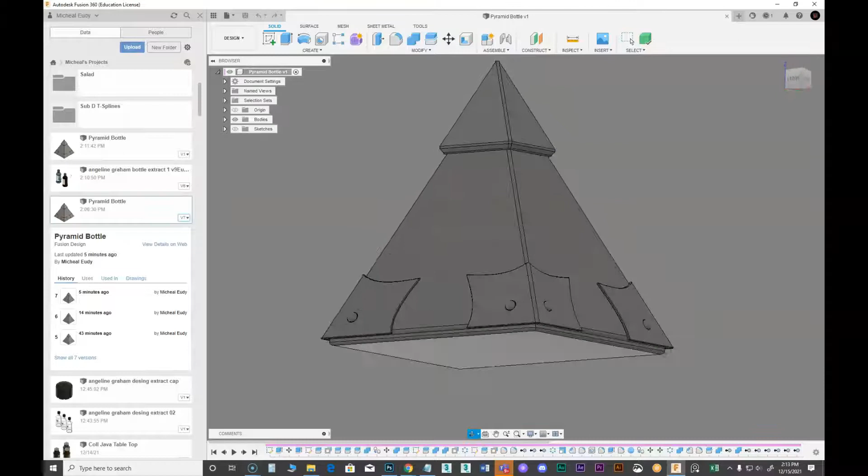Okay, so what I wanted to do is go over how I created a bottle. I had a student that designed some bottles, and I picked this pyramid shaped one. The student was a little reticent on how to build it, so I'm sure there are lots of ways to build it, but I'll show you how I built it.

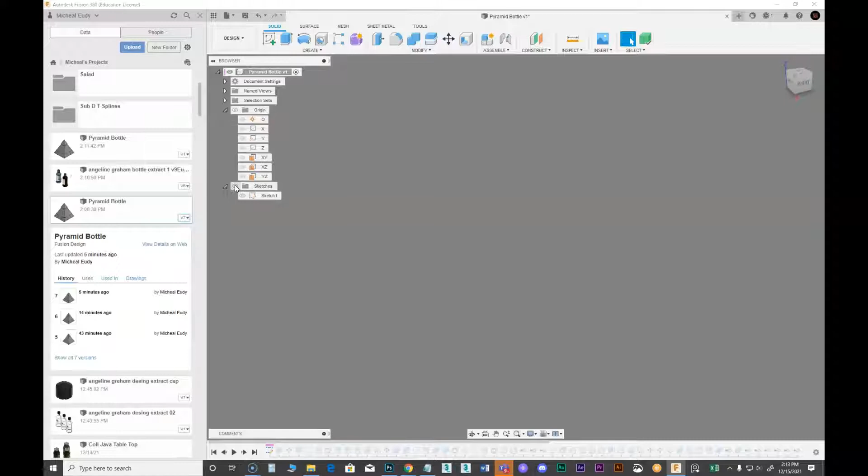So I created a sketch. Let's just go in here and edit this sketch so you can see it. This is the sketch that I drew. Initially what I did was draw this edge as a triangle. The first thing I did was come in here and determine I wanted the base to be a certain width out, and I just drew something like that. Okay, that's the first thing I did.

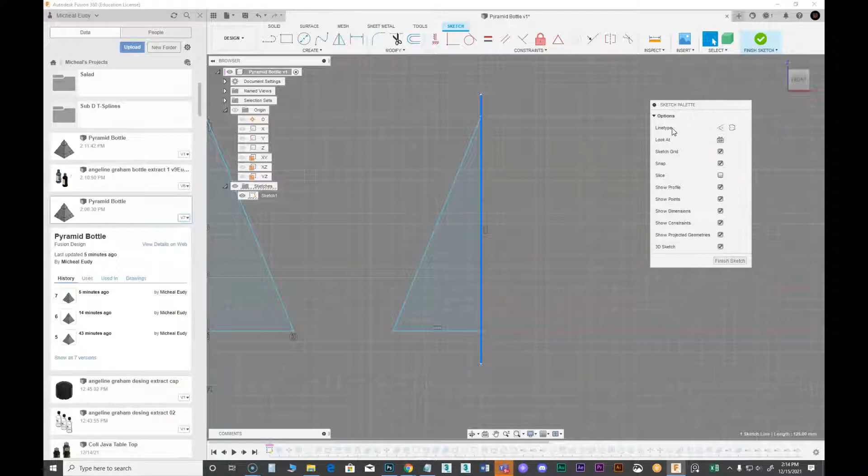So you're just going to go mirror, and it's going to ask you to pick the things you want to mirror, like so. Then you pick your mirror line, and it'll put them over there. Okay, and that's what I did.

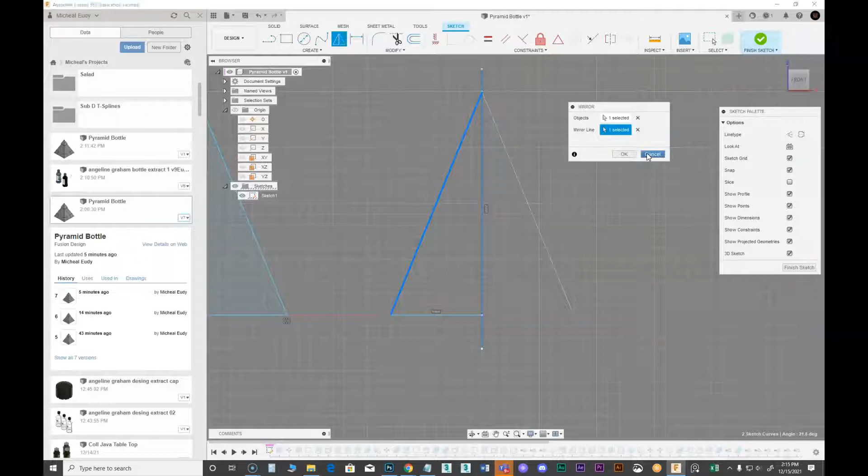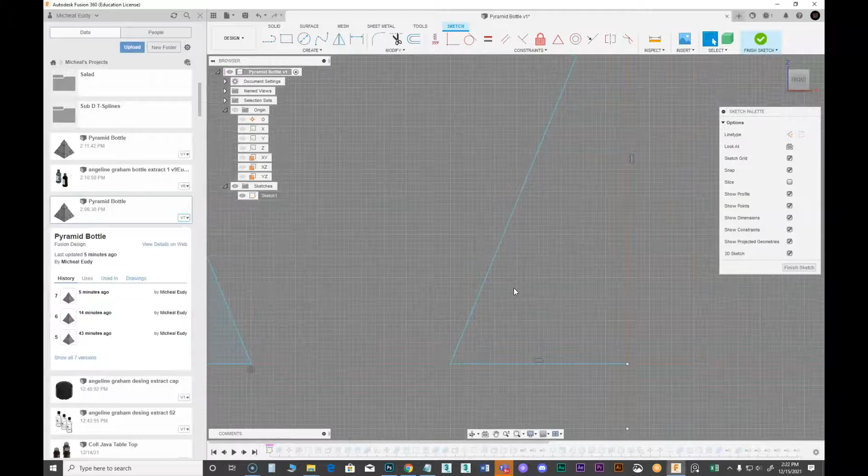Then the other thing I did was get an arc in here, because he's got this kind of a design. If you actually look at it, this was the shape, and these are going to be little metal corners on these, so I needed to create these, and they need to be symmetrical. Once I've determined this is going to be the angle, I'm just going to create an arc in here using a center point arc. So I can click right here, and then determine where I want the arc to be.

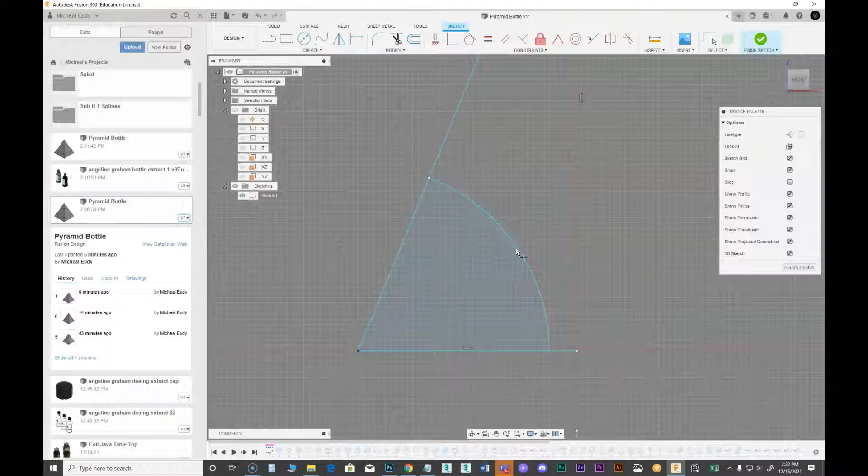Okay, so now the next thing I need to do is find a center point on this. So I'm going to go create a point. When you put your mouse on it, when it gets to the center point, a little triangle will pop up, and you click on that, and that'll put me a point there. Now that's going to allow me to create a line through here, and later I'm going to create one side, and then this will be the mirror to the other side.

Okay, so the next thing I need to do is create another point, and I'm going to put a point on here, and then create a curve from here, put a point out in the center, and then here, click OK. Now I can grab this point and make whatever kind of arc that I want. Something like that is pretty good.

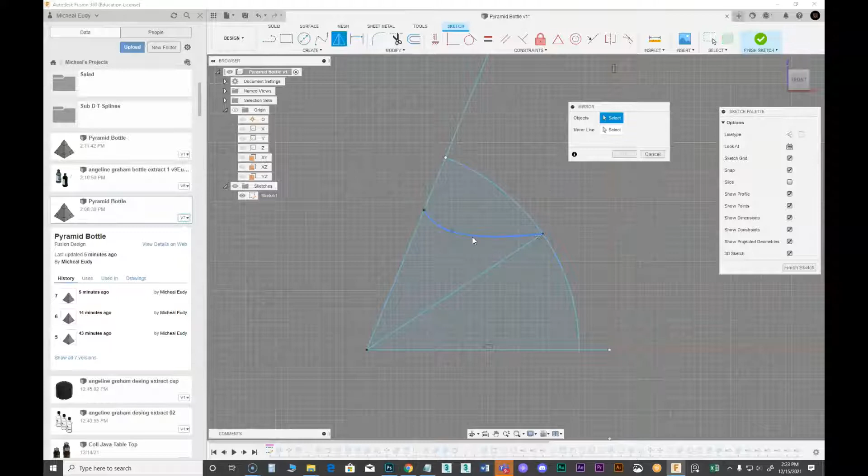So now I need this same arc over here, so that's pretty easy to do. All we have to do is mirror that. We pick the arc, then pick our center line, and it's going to mirror it and put it over there. Okay, so now I've got that, and that's basically going to be that shape. That's what I did over here. That's how I got that.

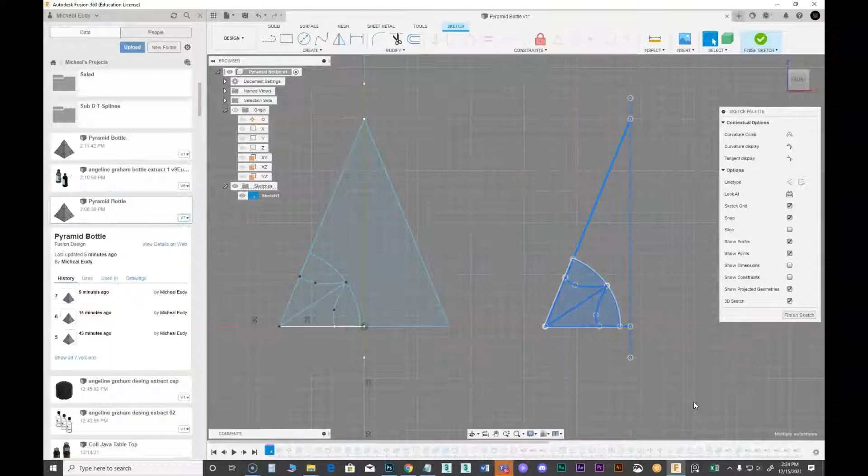Okay, so at this point I don't need this anymore. Let's get rid of that.

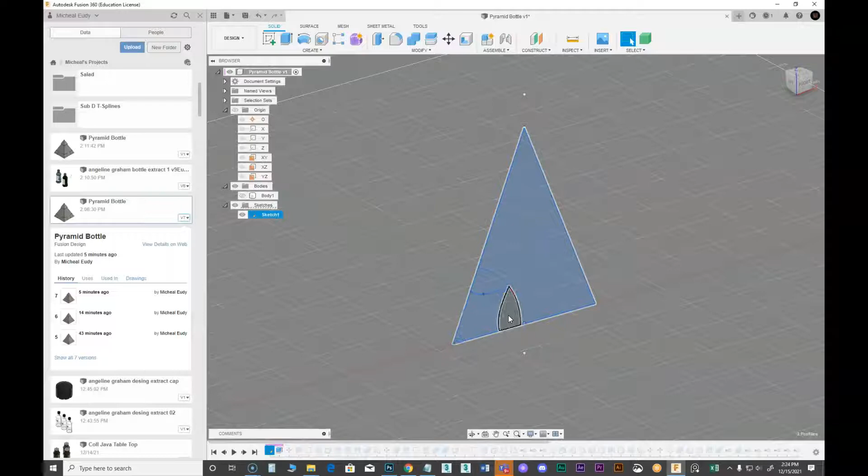All right, so then the next stage I did, we go here, is I just did a push-pull on this, okay? Now, to do the push-pull, I needed it to be symmetrical, so we'll just hide our body real quick. I picked all of this and did a push-pull, and you're pulling it, but you can say symmetrical. That way, when I pull it, I can go one way or the other. That's basically what I did.

Okay, so that got me there. All right, so then the next thing I did was I rotated it.

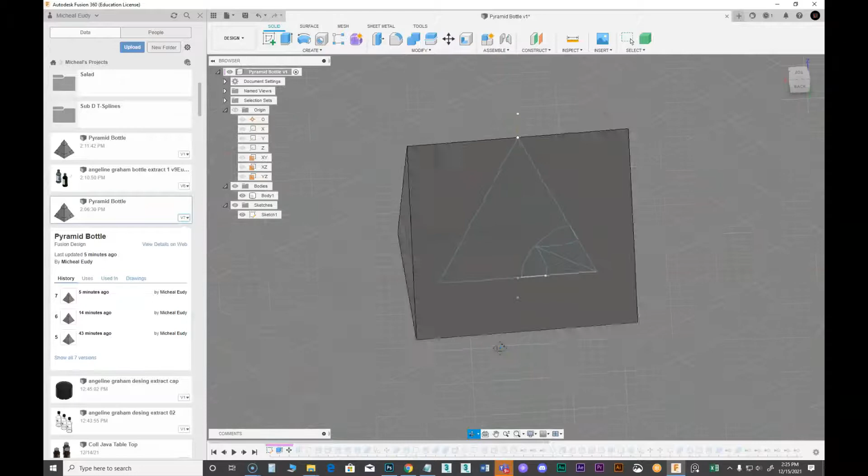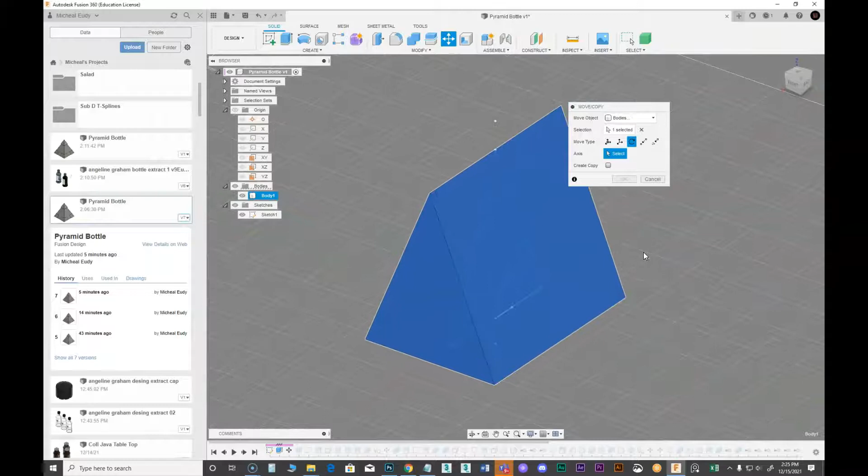That's not showing up. I don't know what that's showing. So I rotated this. What I did is I came in here, did a move copy, picked this, clicked on rotate, and you got to select an axis. So I turned on my origin and selected that axis, and then I was able to rotate this 90 degrees.

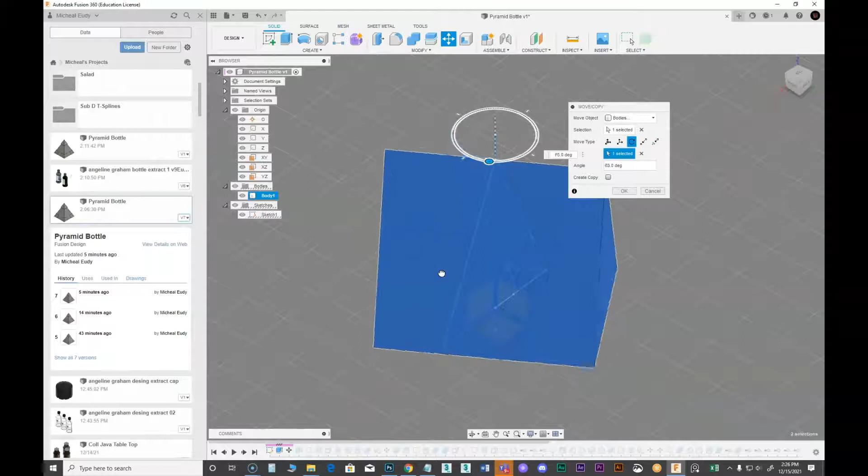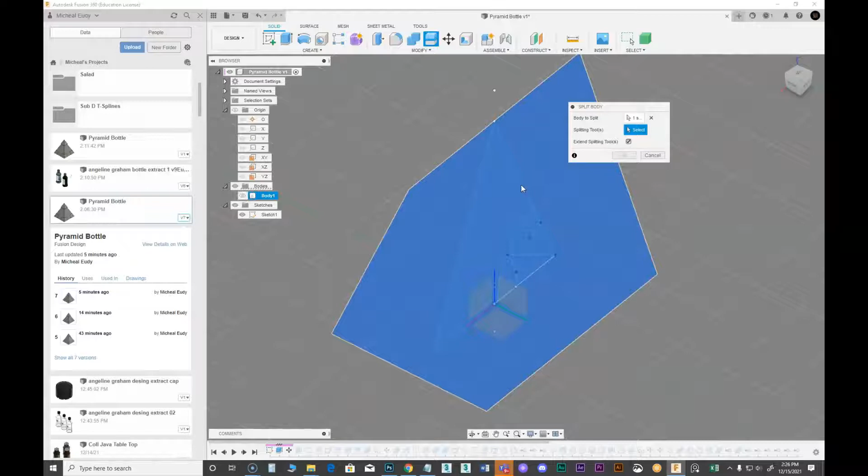Okay, so once I did that, then that allowed me to use a split body on this. So I could come in and say, okay, split this and use these edges as the cutting tools, and that'll cut my pyramid shape out of there, like so.

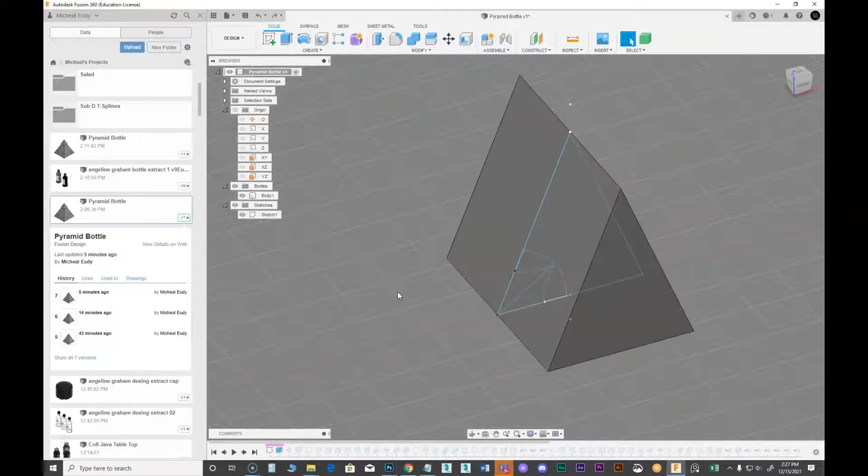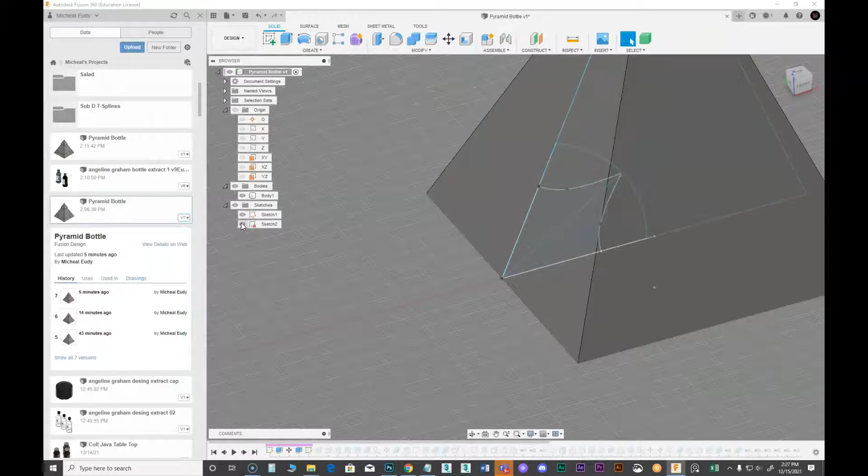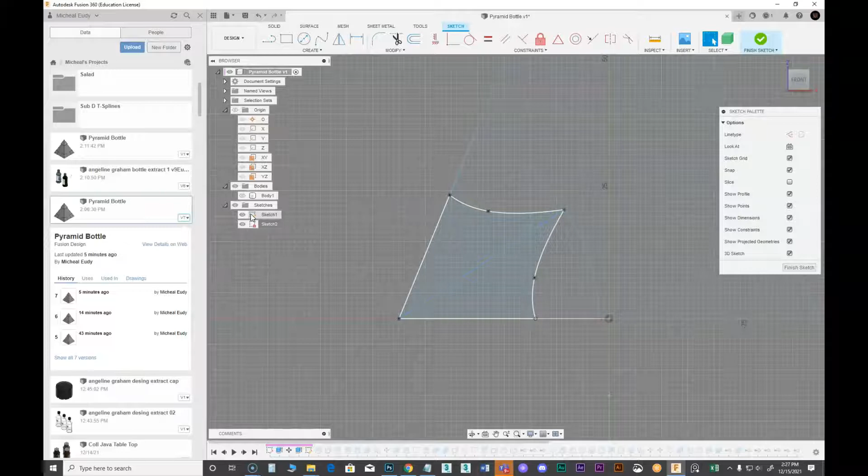Okay, so from there, that gave me that. Then I came in, and what I needed to do was have this sketch on a different plane because this was breaking it into different pieces, so I couldn't use it as a cutting tool. So I just made a new sketch and traced that, recreating it so that it was on its own plane, and then it's a solid piece.

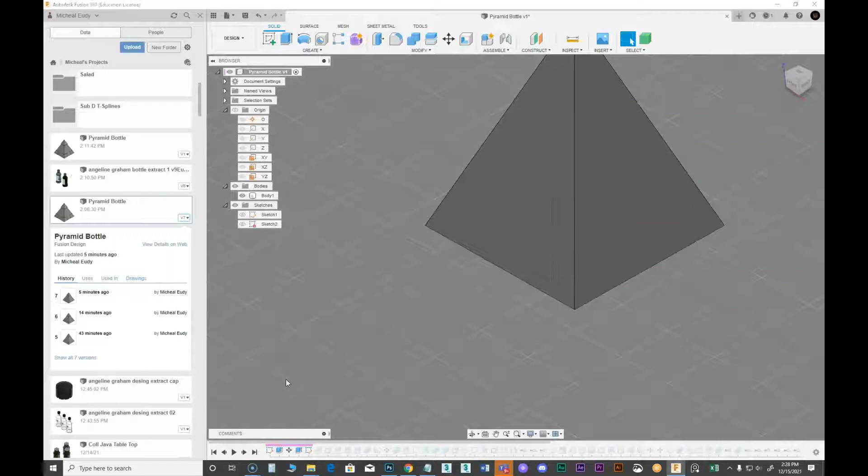So that's what I did, and that allowed me to come in here and do a split body. I could pick this, then pick that tool, and it will cut it. So I did that, and that cut it all the way through.

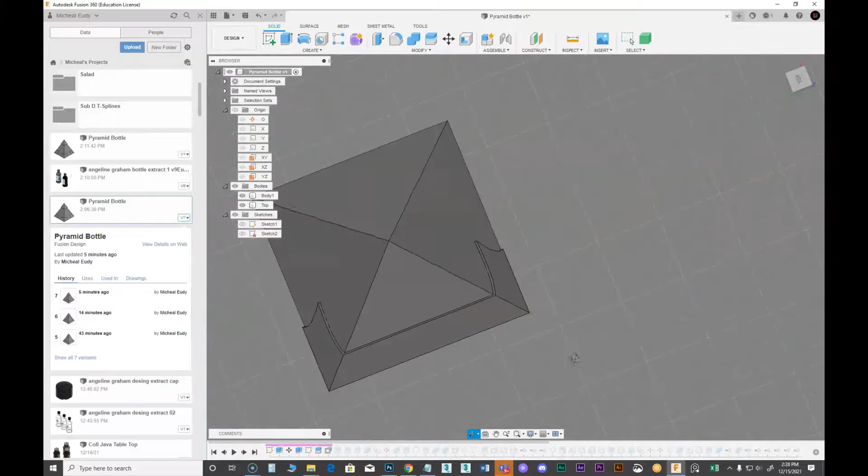Then what I did was an offset face. So I went to offset face, picked this, and pulled it out. I did the same on the opposite side, taking all of this and offsetting it out. This is going to give me this little lip I need for a metal piece.

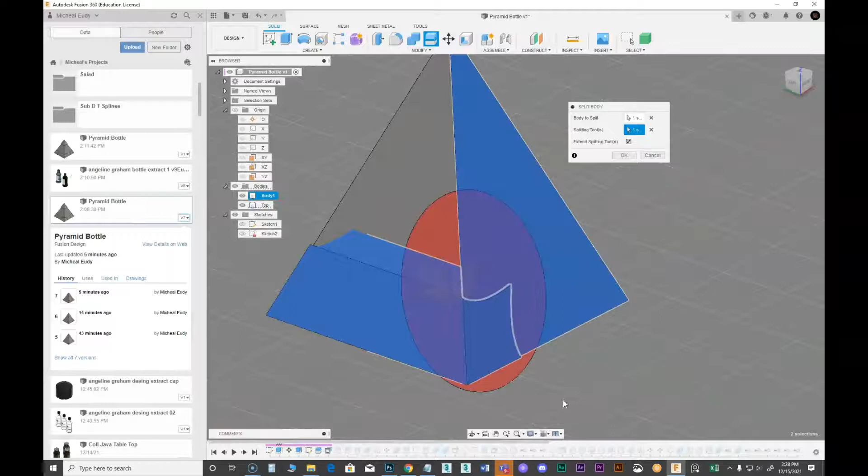Okay, then I did a split body. So all I did at that point was split this body with this, and that's going to slice it straight down. I had to do that 3 times because I sliced it here and there. So I sliced it 3 times, and that gave me these cut off from the original piece.

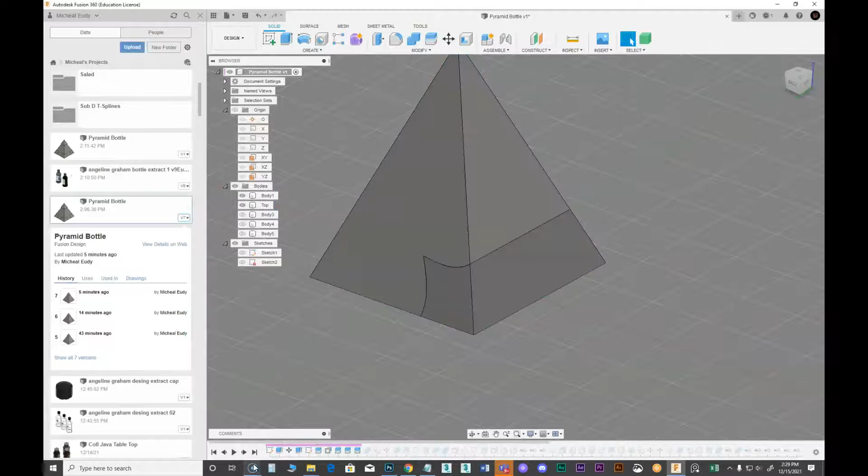And then, once I cut these off, I combined this back together. So I just did a combine, and I combined these back together as one thing. That's the next thing I did.

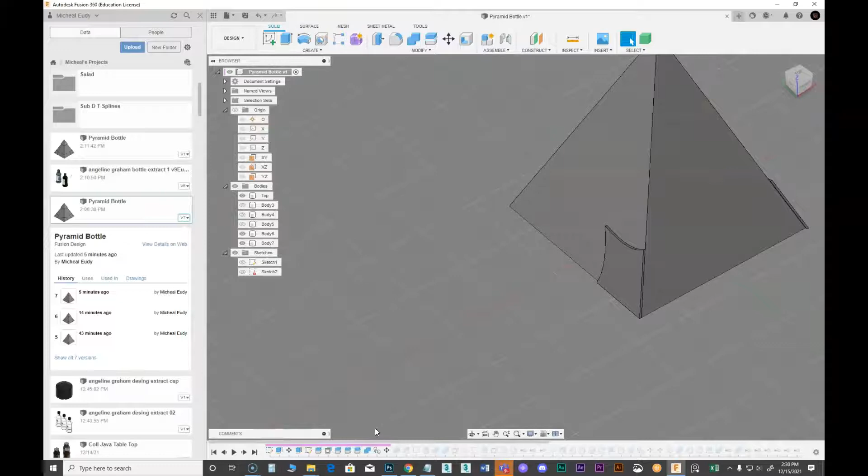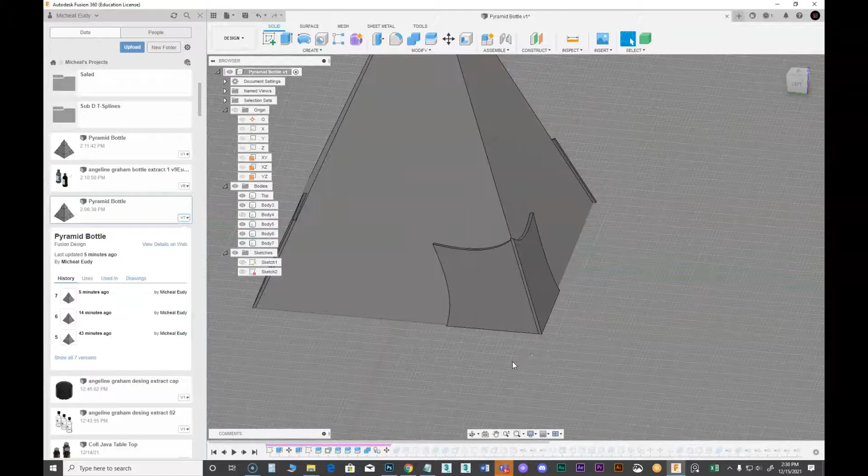Okay, so then I copied these to the opposite sides. I took them both and did a copy with an array, so that they rotated back around and met perfectly. So then I was trying to get this edge. That's the reason I did two of them, copied them around, then it gave me a junction here.

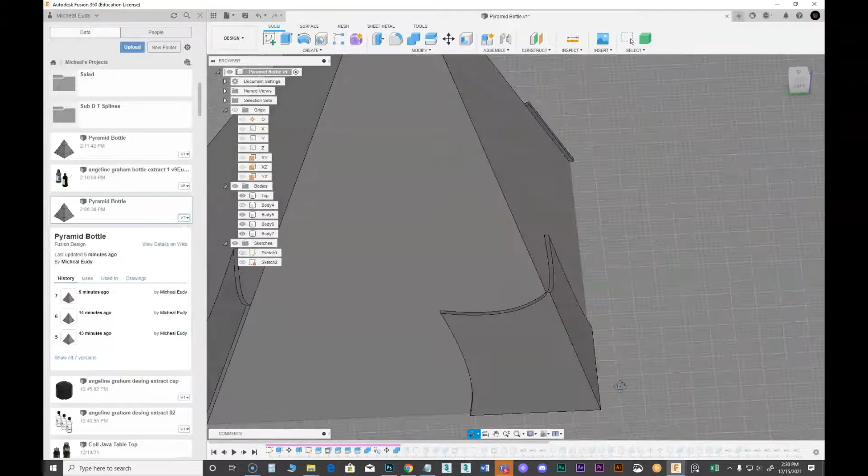Okay, then I combined these two together, and then I did... let's see what I did here. What I did was there was a little lip in here.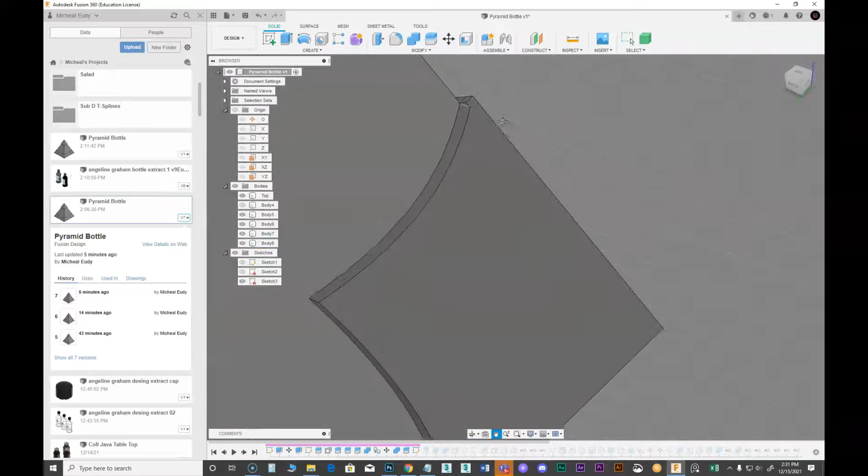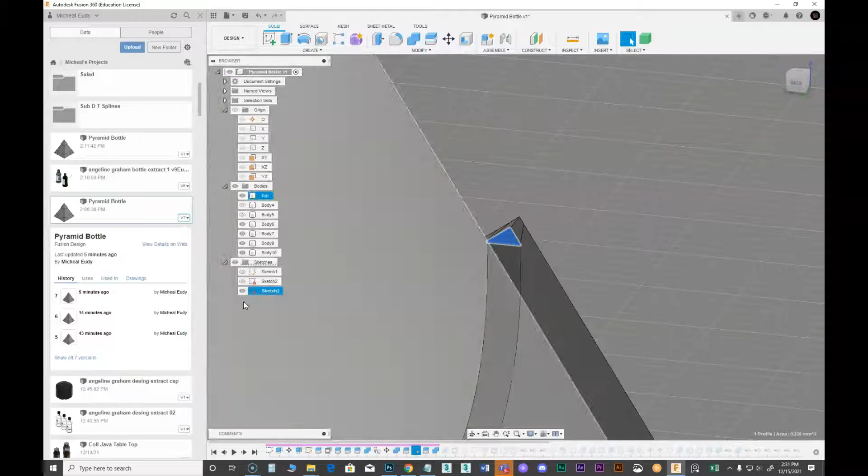So what I did was I created a new sketch. I said create a sketch and clicked this, so that's going to be the plane I draw on, and then I just drew a line from one corner to the other. That gave me this, which then I could do a split body and project and cut it with this, and then cut off that little lip, which is that little piece right there. So I cut that off.

Okay, what did I do then? Okay, so that gave me that little corner.

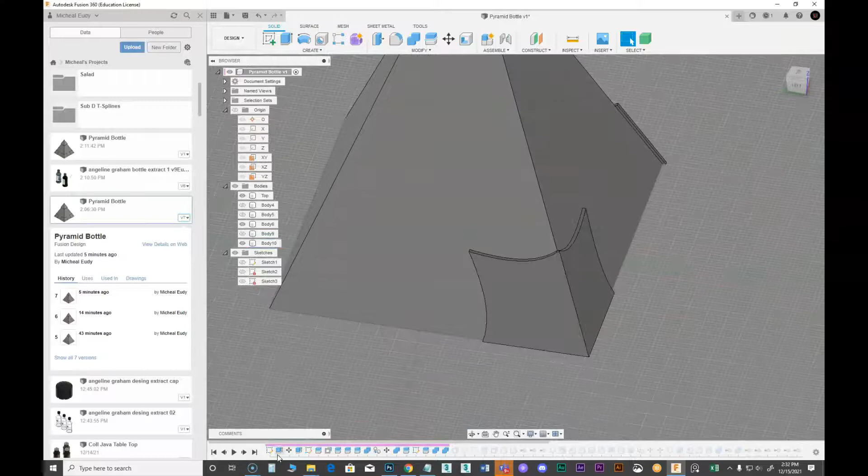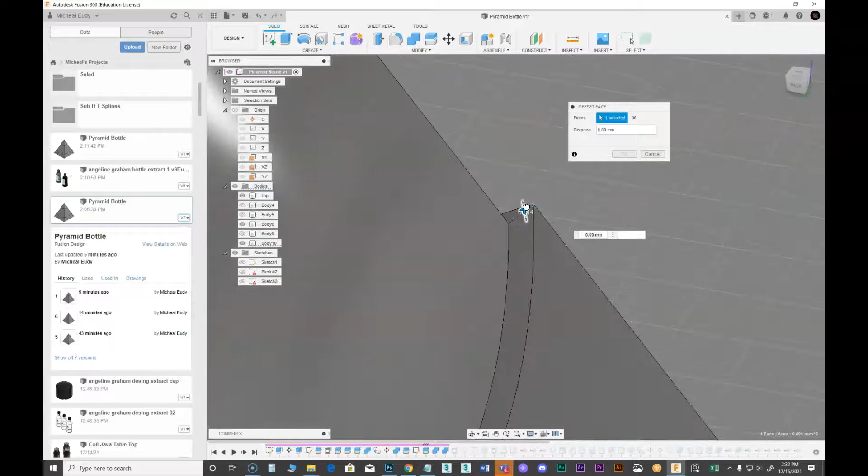Then what I did was an offset face. So I did an offset face to this and pulled it up till it was a point. Now you have to be careful with this because it'll over invert on itself. So I did it, and I got it where it was just... maybe I can pull it in here.

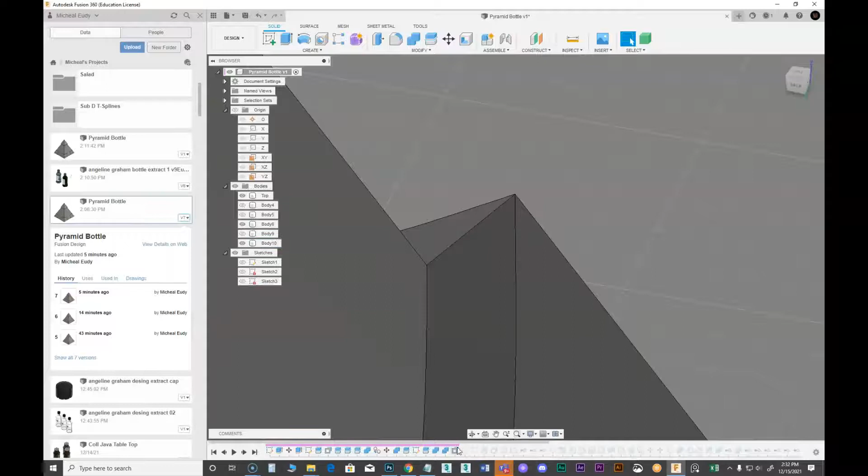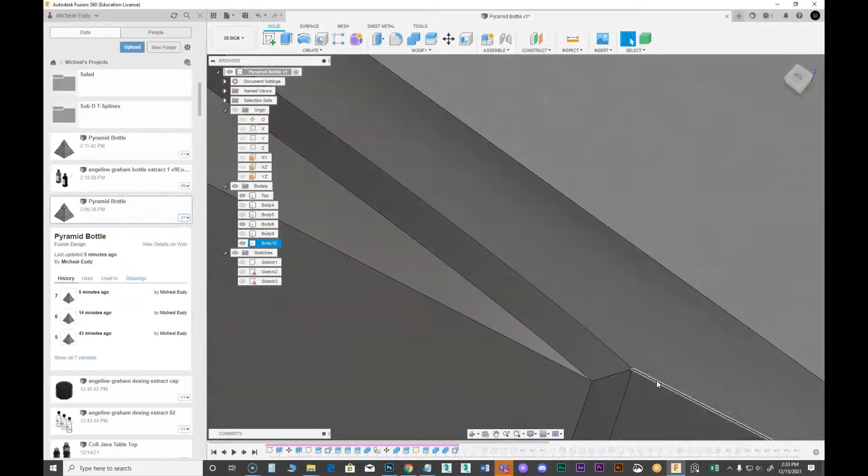So I ended up pulling it so that if it got really close, there was a little bit of a point, but I'd rather have that than it overlapping with an extra piece sticking out. So it's not perfect, but it was good enough, because I'm going to come back and fillet this later, which will get rid of all that.

Okay, what do I do next? Once I had that, I did an array with this. So all I did at that point was an array, which I really didn't need to do since I wasn't finished with this part, but I did it anyway just to see.

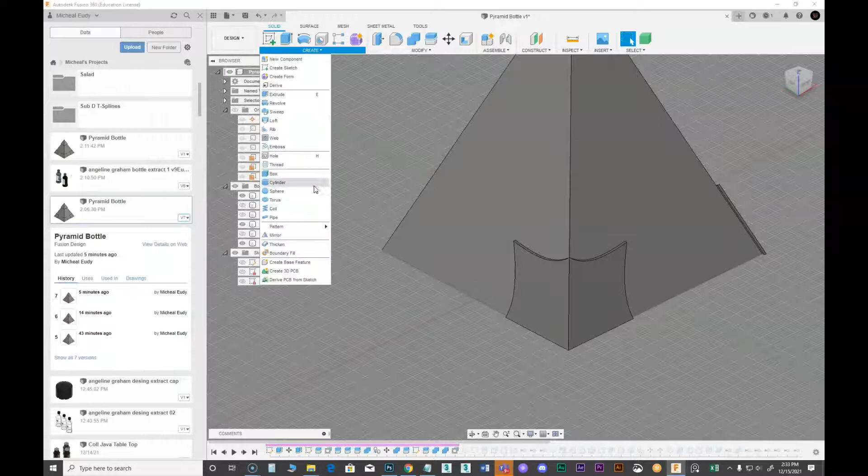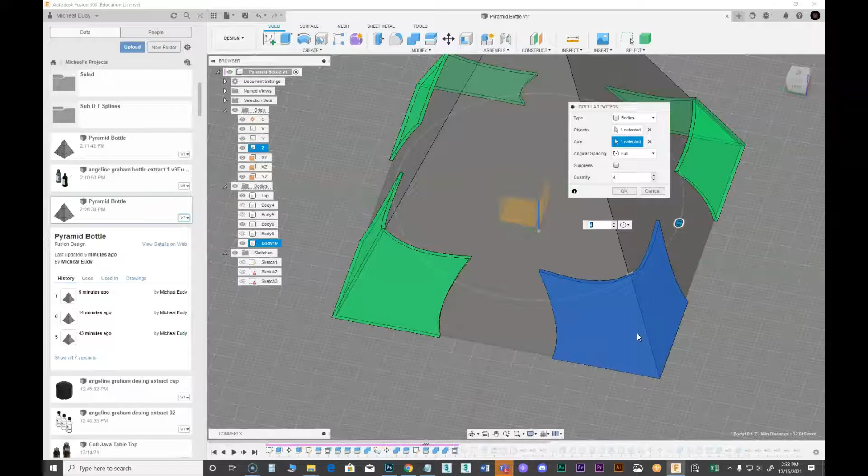So I just did a circular pattern. You pick this, then pick our axis, which was here, and I said 4, which gives me one on each corner. Eventually I decided I didn't need that because I wasn't finished with this, since I needed to put beveled edges and stuff in. So I eventually deleted those, but that's what I did just to make sure it was going to work the way I wanted.

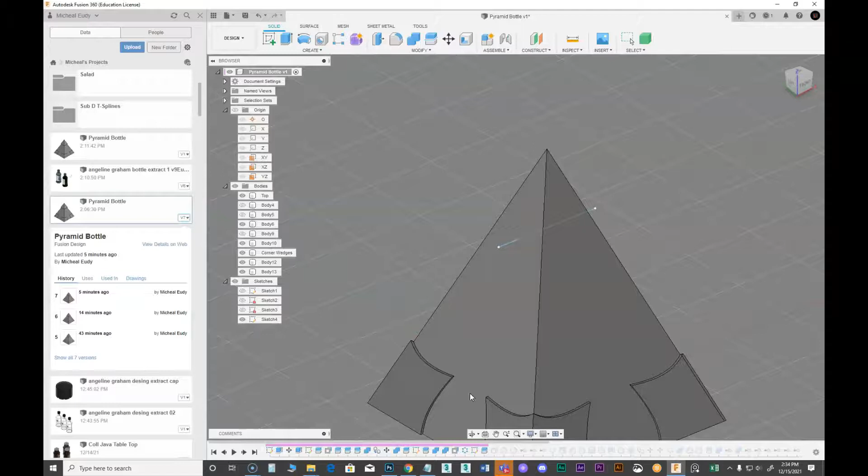Then I wanted to come up here and cut the top off. So I drew another straight line, and then used a split body tool, taking this as the cutting tool, to cut the top off. That's how I got that cut off.

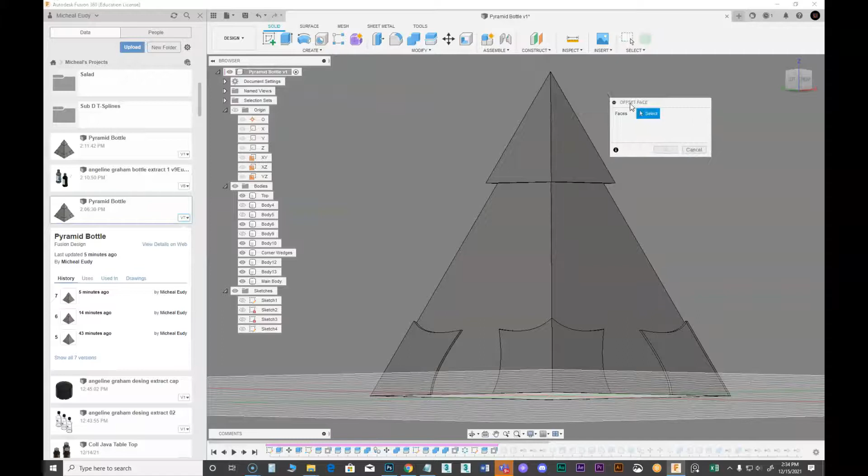Once I had that, I used offset face, picking all the faces and pulling them all out. That's how I got it bigger.

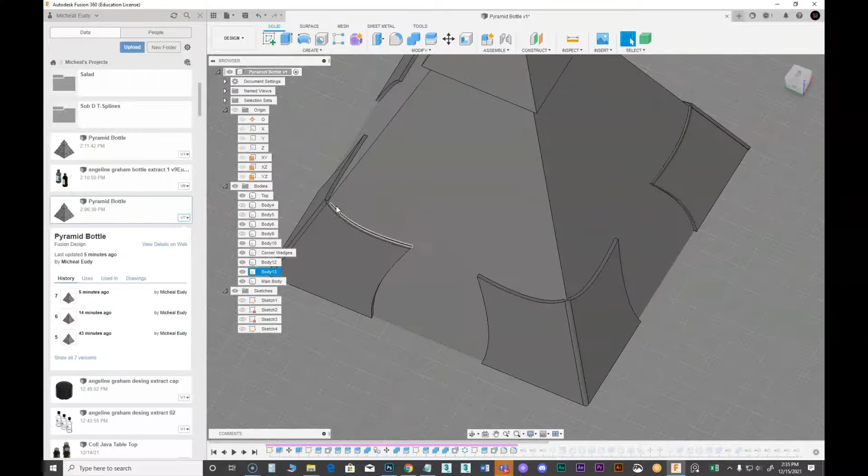Then I came in and started filleting these edges. I put a fillet here, and wasted time because I did it all the way around these, which was really a waste of time, since I ended up deleting all of those and just making one that was completely right.

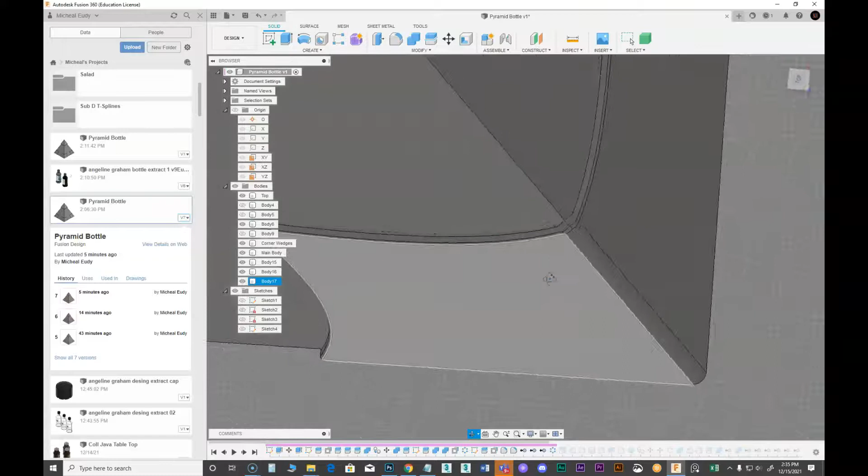Then I arrayed it back around. So I got the fillets here, and also went around and did little fillets on all of these edges, so there'll be a nice rounded edge to catch highlights.

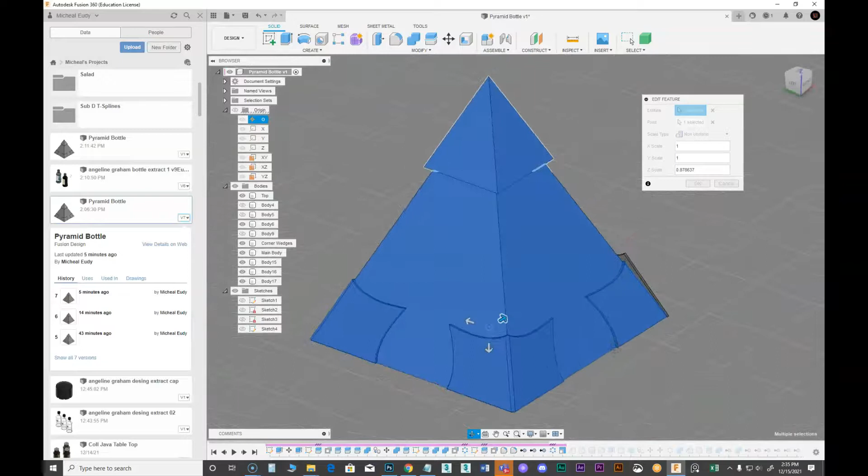Okay, what was the next thing I did? I scaled it down a little bit. Thinking back now, I probably shouldn't have done that, because it really needed to be a little bit taller and skinnier. But anyway, I'm just proving the point here of how to build this.

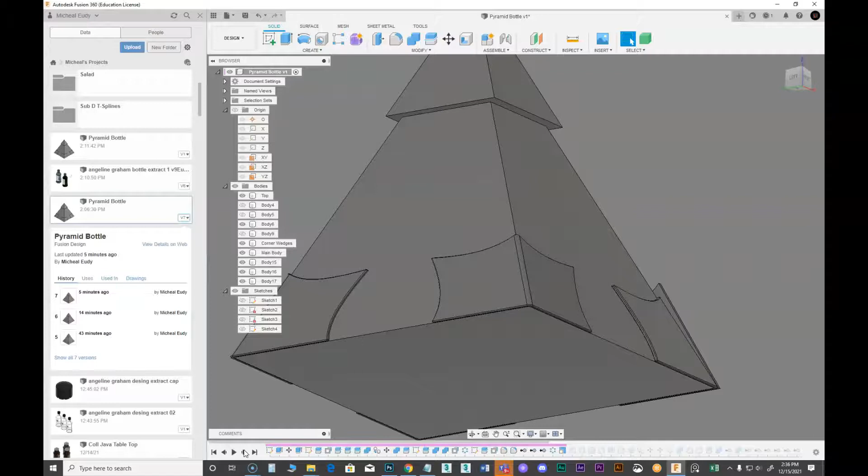So the next thing, I didn't want it to go straight in. I wanted it to actually be chamfered a little bit, so a little bit of an angle. So I came in and chamfered that to give me a little bit broader of a lip there.

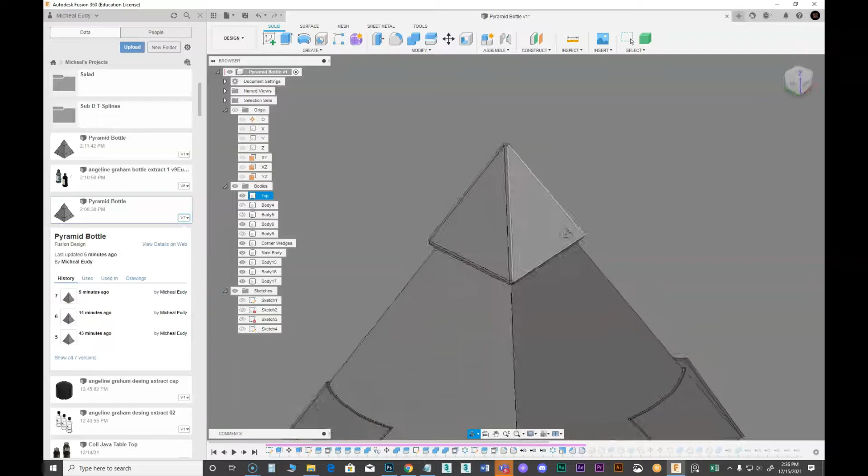Then I came in and did a fillet all the way around that so it doesn't have sharp edges. So there's a fillet here on all these edges and a fillet on this bottom edge too. I did them all at the same time with the same length of fillet.

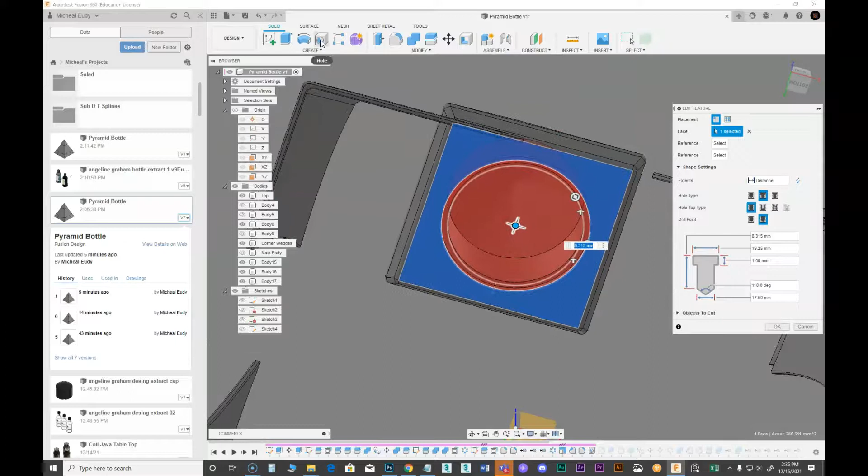Okay, then what I did was hide the body, and then came in and put a hole in here. So I used the hole feature, put a hole, and adjusted it, and this is where the threads will eventually be put in. I did a little offset there too.

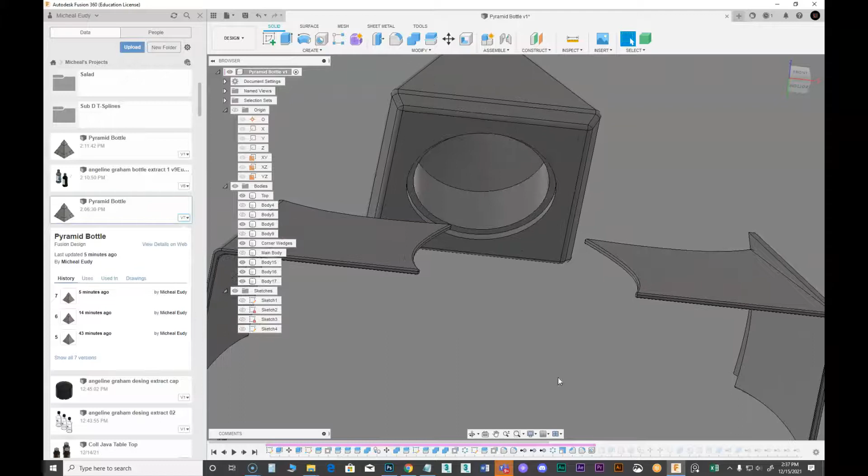So I never did go back and put the threads in for this demonstration, but I would just go back and put the threads in, and fillet some of this. Okay, from there, what do I do next?

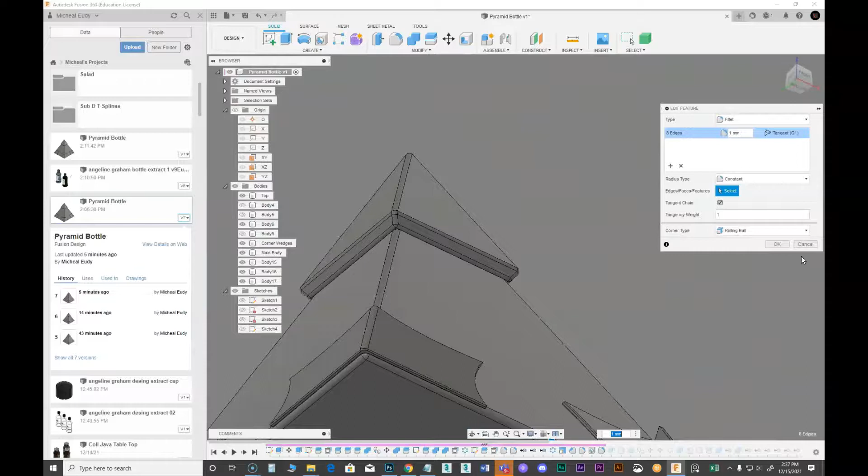At this point what I did was I picked all of these edges and did a fillet on those to soften them up, because this is going to be glass, so it wouldn't be razor sharp.

The next thing I did was an extrude. I wanted the bottom to come down a little bit. I didn't want it to sit right there, I wanted it to come down just a little bit, and then I put a fillet on that to round it so the glass will come all the way down, and then this metal will be on top of it.

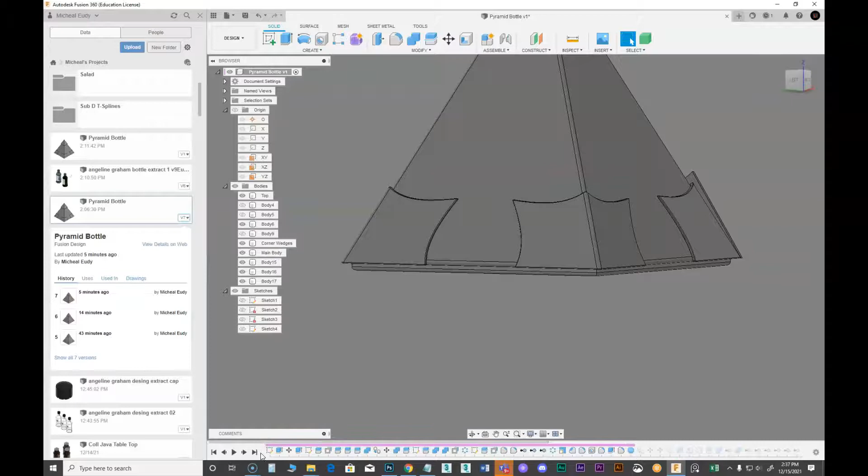Then I came in and placed... where did it go? Oh, there it is. He had a little rivet. As a matter of fact, we need to hide that. He had a little rivet in the original concept art, so I came in and put that in there.

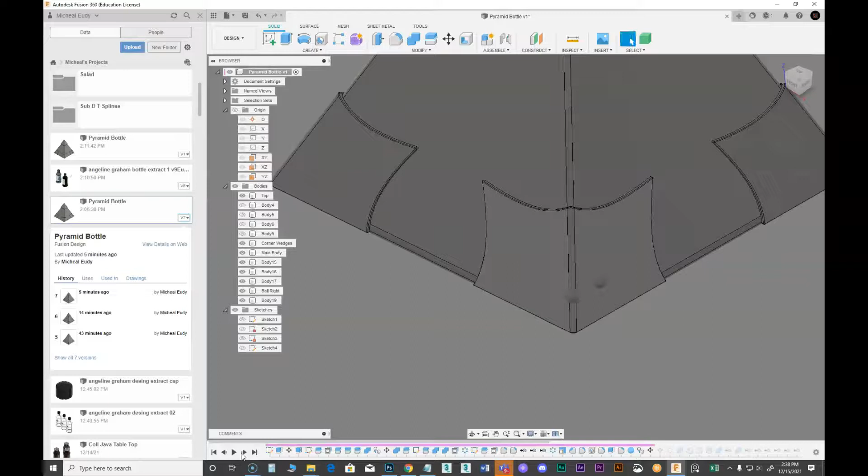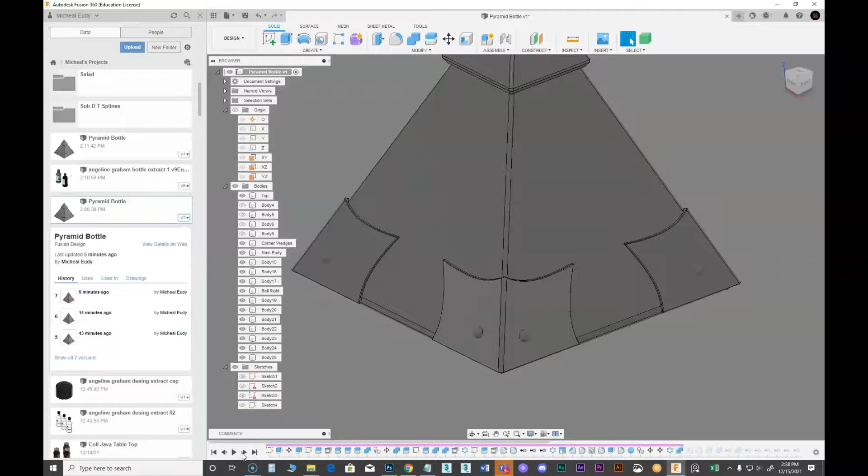Then I moved one to put over here, so I just made a copy of it and put it over here, so you had two of those. Then I did an array with them, and here again I realized I really didn't need the array, because what I really needed to do was take the time and really cut this in, which is what I did here.

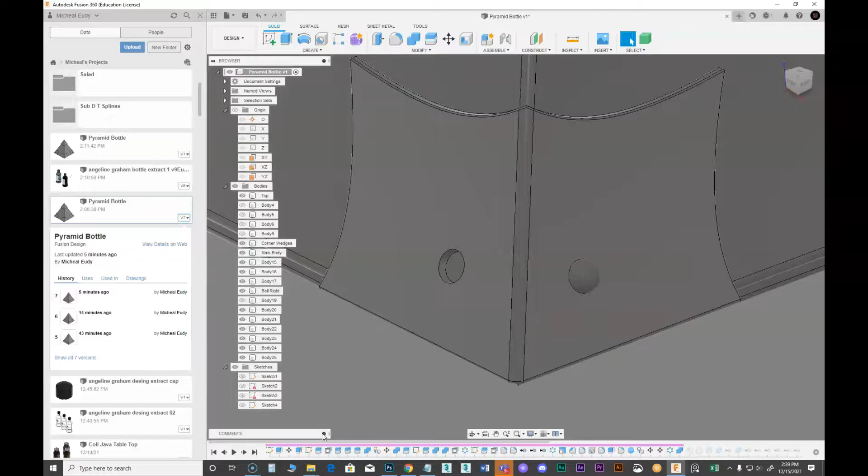So what I did here was come in and cut a little hole in that. Then I did one over here too, and then a little chamfer in there because... what did I do with the other ball? I wanted it to set in there where there would be like a hole that it would set into.

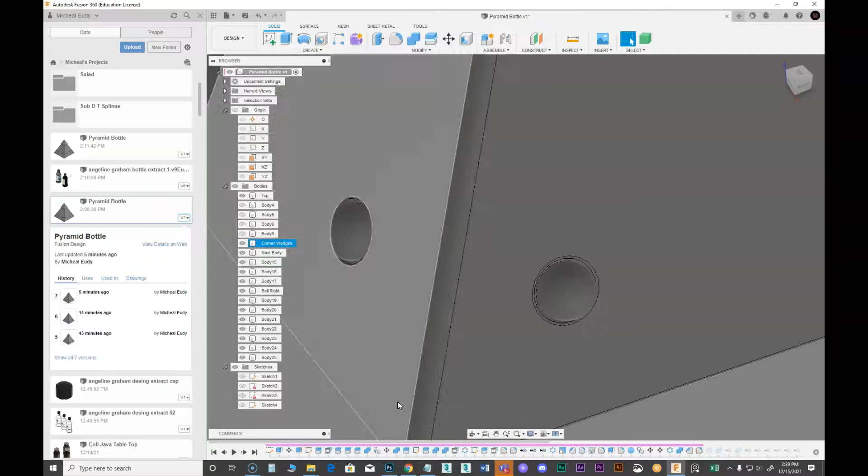And then I filleted those so they weren't sharp, to catch a nice highlight on those.

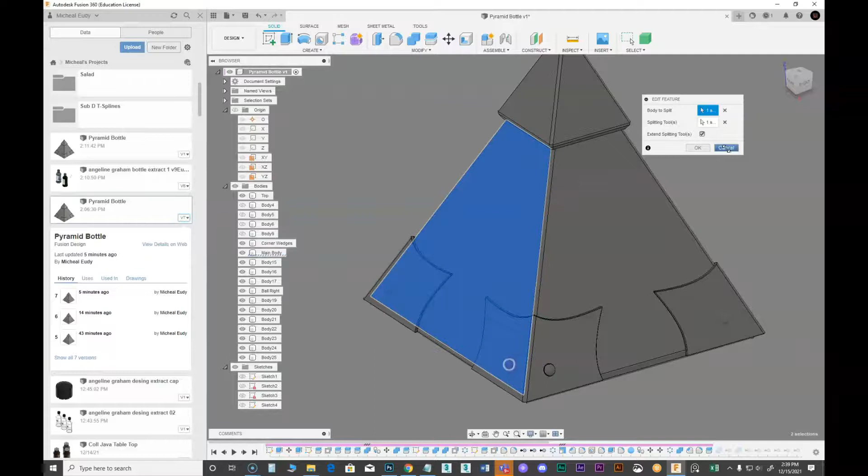So what do I do here? Oh, I split those spheres so that they didn't stick into the glass, which you really won't notice here, but you'll notice it later when we have the glass in there.

Let's see, I did a combine here. What did I do? Oh yeah, so I just split these so that the back was cut off. I'm not really sure that I needed to do that.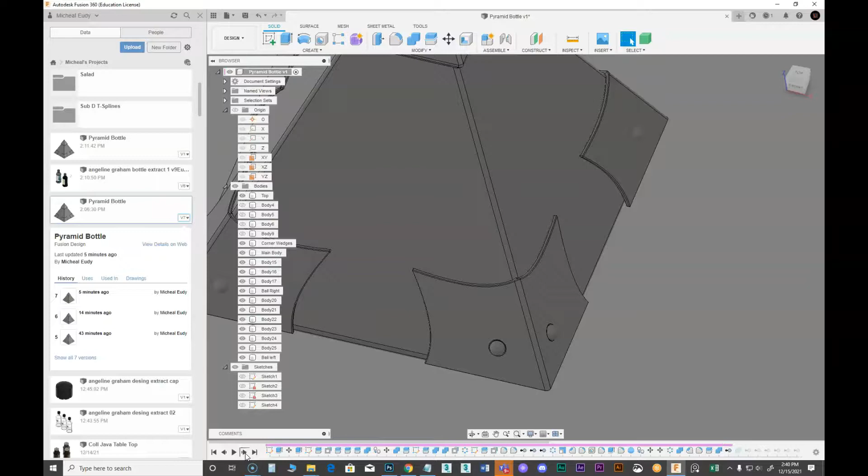Then eventually, what was I doing here? Same thing, I was using those cuts. And then eventually what I did was...

I came in here and deleted all this excess stuff because I realized that once I got this done, I could just array this all the way down. So I deleted all that excess stuff I had built, and then I just did an array.

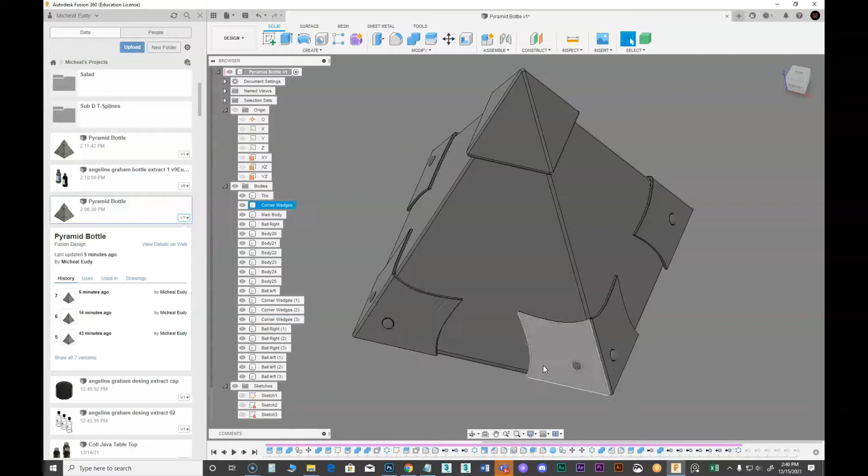So I took this, and that's the center point, and did four of them, and that copied my fillets and everything all the way around there, and then that's pretty much it, and that's how I got there.

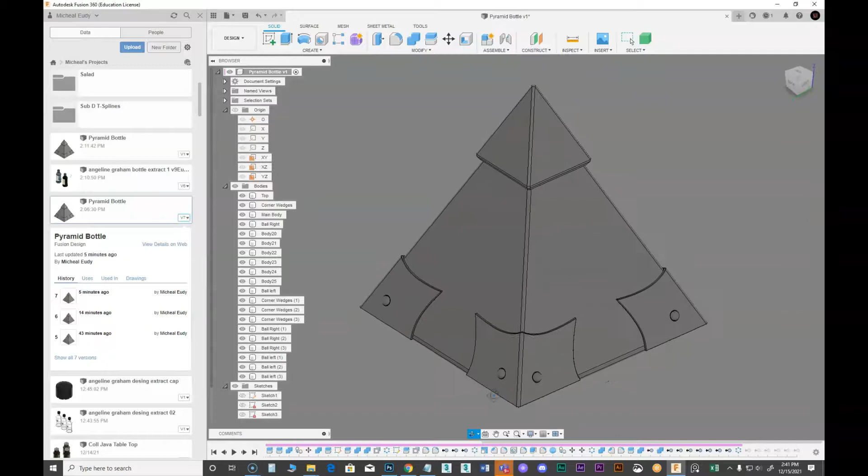There may be other ways, I'm sure there are other ways, and if I approached it again I might approach it differently, but that's how I approached it and that's how I approached building that shape. I still think it's a little short and fat, but the procedure is correct.

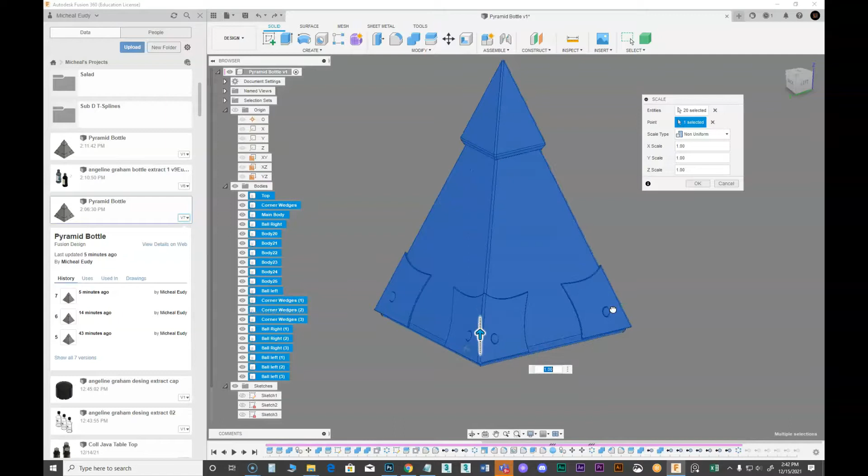Then we want to pick our point. Let's pick this point to scale it from, and then I could come up here and scale this up. Now, I would never really do this, I would have to come back and redo parts of this because I want those to be round. So this is really not the way to do it.

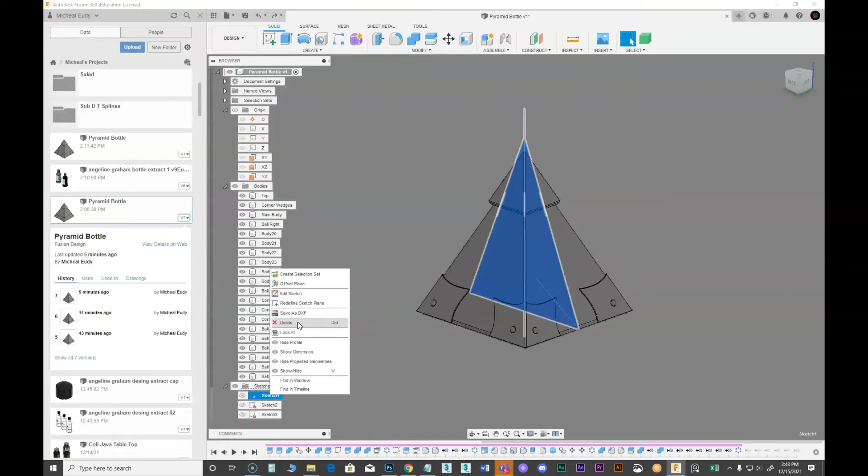I might even be able to go back, I don't know the answer to this. Matter of fact, let's just see if we can go back in time to this, and we'll see if this will work. Can I scale this? I don't think I can do a non-proportional scale in here, so I can't do that.

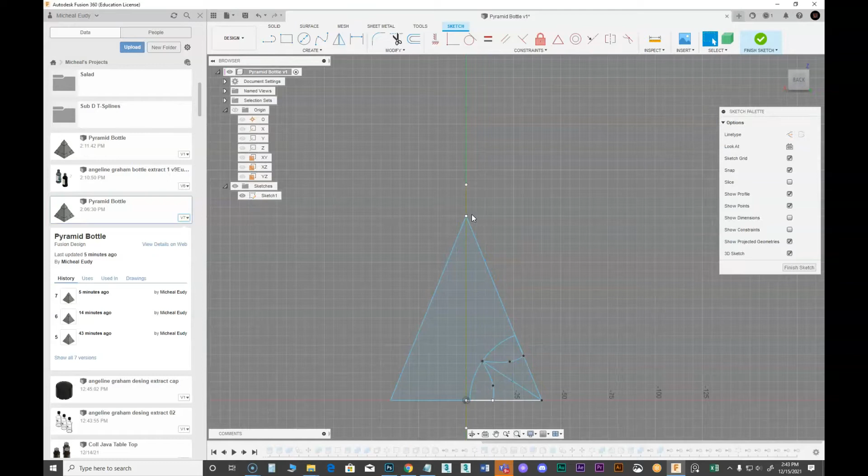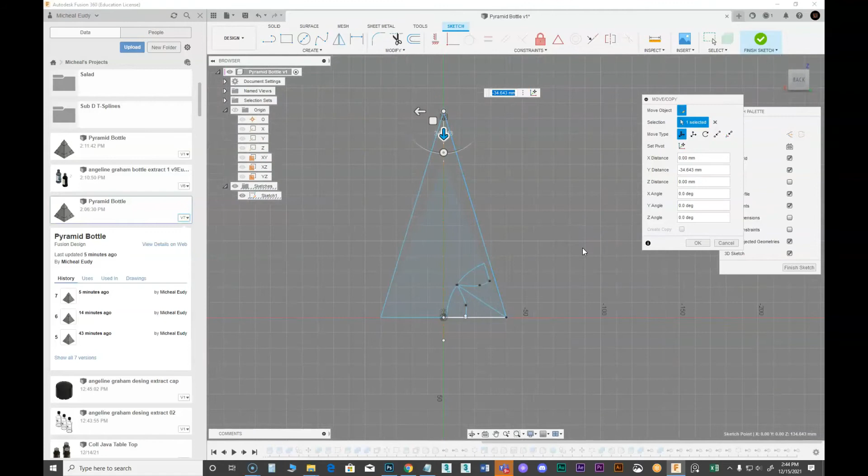So I wonder if I can move this point up. Okay, we'll see. Yeah, I can see that it breaks. I just need to make sure that I got those proportions right before we did it.